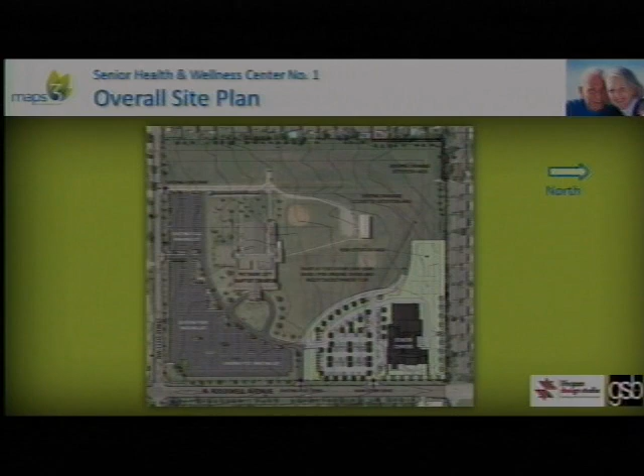As you recall, our site is located on the northeast corner of the present Putnam City Baptist Church site, just north of 112th and Rockwell. Our site will have direct access from Rockwell as well as connectivity to the church property, and will abut the residential district to the north. You can see the building fronts the street and faces south towards the parking lot.

At this point, we've gone from pretty pictures to real technical drawings. This is a site plan, and the important thing to note is the bold line around the perimeter of the project, which is basically the property line that will demarcate the land to be transferred and sold from the church to the city as the site for the project. You can also see on the site there's a detention area, some programmed outdoor space, and the parking serving the facility.

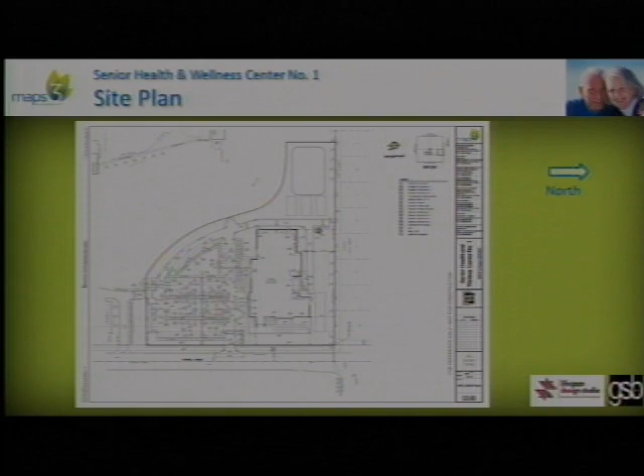There will be people who come to this facility who may never have exercised before, and as they move around the building, they'll see people of their own age and ability level exercising. The hope is we can ease folks into this healthy lifestyle by giving them exposure, and maybe after coming a few times they'll think, I can do that, I'm going to give it a try, and we'll have the resources to assist them. Of course, the fitness pool is a key component to the program.

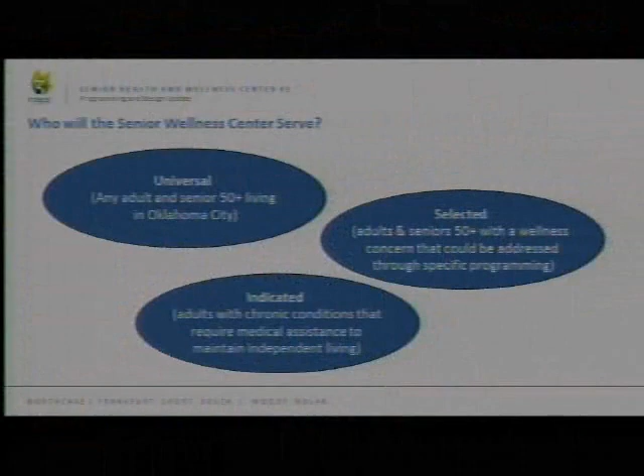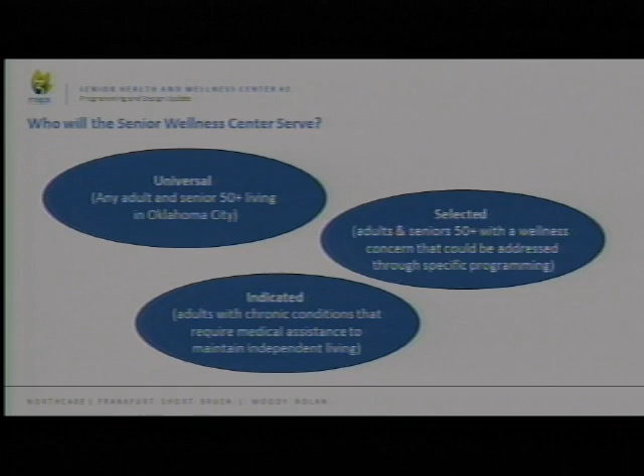Our vision really was to use a concept called the universal matrix of wellness, so that we identified appropriate activities for every level of functioning for seniors. On one paradigm, it has the universal, selected, and indicated kind of things to consider. Universal are for individuals who are generally healthy without major concerns, and you want to keep them healthy and moving forward. Selected may be individuals who have a health issue on the horizon.

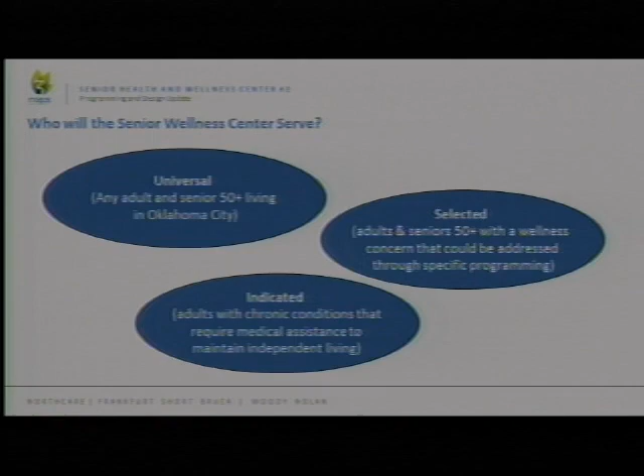We also wanted to have all the kinds of inputs that we needed for communication to make sure we're running this as a world-class senior wellness center. So we have our own board of directors that's serving as a governance for us, but we also plan to put together an advisory board.

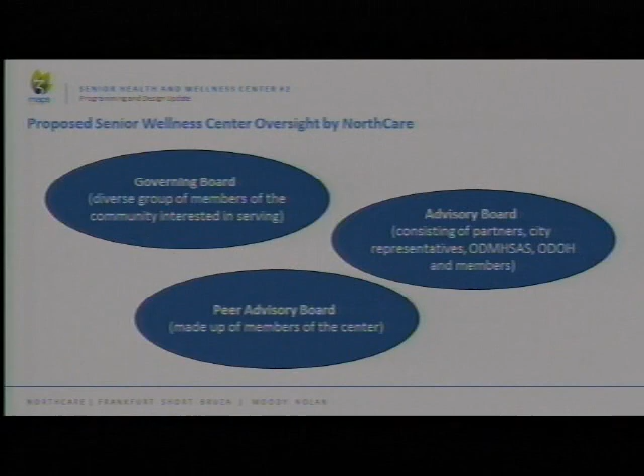The advisory board still could have a lot of changes before this thing is up and running, but we anticipate the organizations that fund the services that are actually part of the operations having input. We anticipate the partners that make up the collaborations that are working within the Senior Wellness Center, and some individuals who are seniors coming to the center being on this board as well. And then, of course, we want a completely consumer senior board that's advising us all the time on how this should be fluid and constantly changing and meeting their needs.

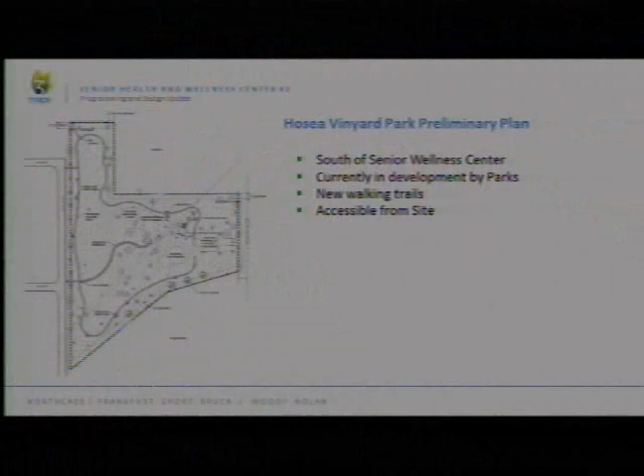What's interesting is that both of those facilities will be able to work with the center. The park to the south is planning a new walking trail that the senior center can actually access and use as well. And to the north is the high school, and they can use some of the facilities - there's a tennis court and parking for their special events.

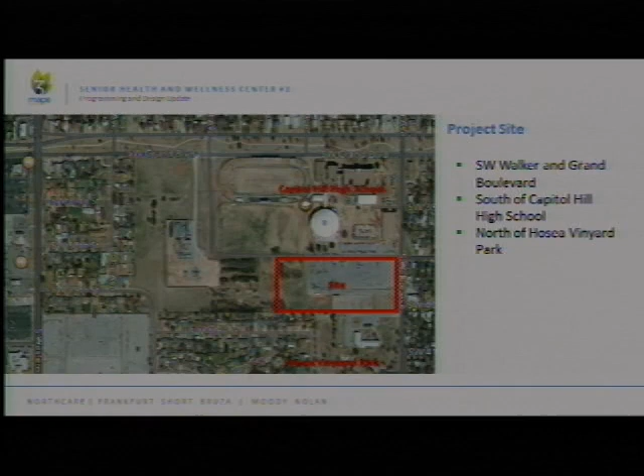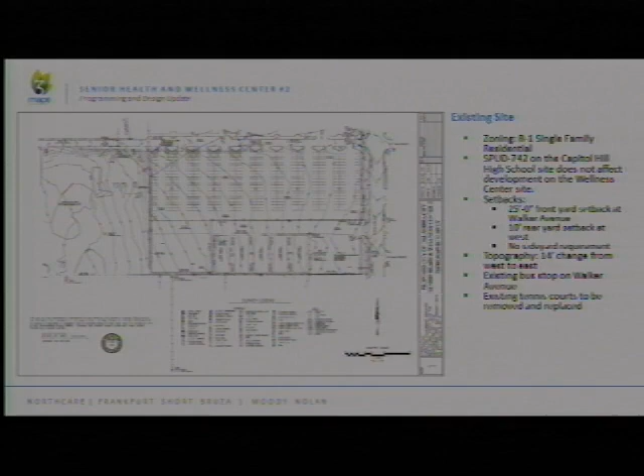This is a survey that shows the existing site. You obviously can't see it on your screens, but the tennis courts were our original site here. This is a parking lot that's existing, and it is currently zoned R1. It's all owned by the school district, and there are some site challenges - there's a 14-foot drop across the site that requires a little extra work on site development, and we have to relocate the tennis courts as part of the arrangement with the school district and build new tennis courts for them.

Area plan. I'm going to turn it back over to Mark. We're getting the design now, and he can go through the concept a little bit.

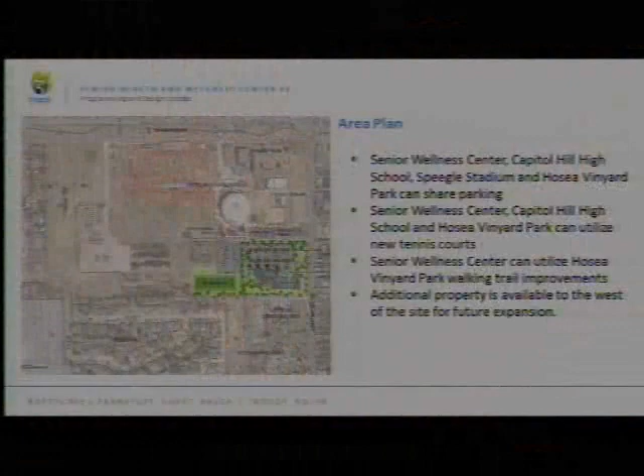When we look at this site, it's a great site with the connection to the park and the high visibility along Walker, and the ability for parking and to share parking with its neighboring facilities. It was really a project that we looked at in terms of how it fit the site - creating a building that had a front door, a front porch, and a backyard and back porch that connected to the park.

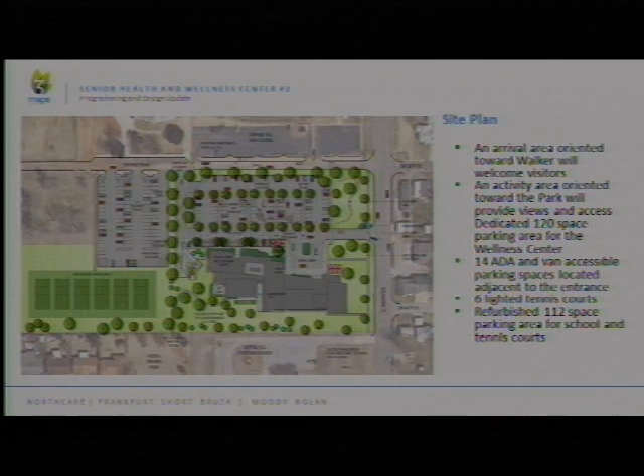The front door has a drop-off loop with covered drop-off for buses and individual cars, a place for people to sit and wait in a front porch setting. It connects very closely to what we call the back porch, which is the covered area on the south side, shaded with both overhangs and trellises that create an outdoor space.

When you look at the building, the idea is that when you came up to it, you always saw activity - you had different choices of things to get involved in. As you came through the center of the building, right at the center of this facility, there's a space accessed by an accessible path from every single parking space in the facility.

You came in, you saw activity, you saw people walking by, jogging by, you saw people in different levels of different types of lounge seating. They might be watching television, they might be playing games, they might be working on equipment. And as you came into that center of the building, you also had access to a cyber cafe and a coffee cafe right there, and a welcome desk from which anybody could look and see all the activities.

We tried to do a building without corridors, a building flooded with natural light, where the circulation was a path of its own, where people would go from different types of salon settings, where people would have different opportunities to interact with each other.

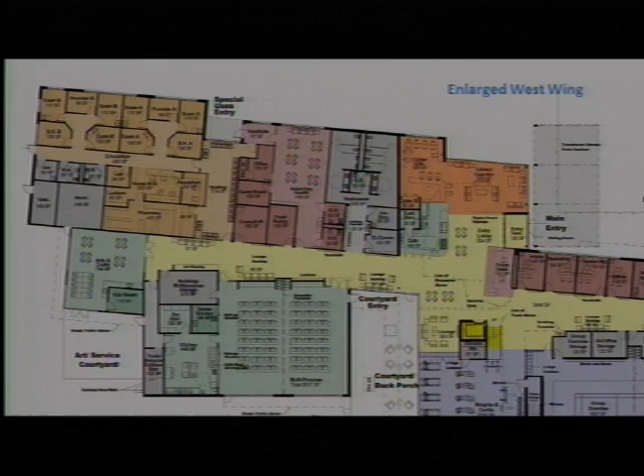On the west wing, we have the more educational and health-related areas, which include a clinic, the adult daycare, a large multi-purpose room with an associated warming kitchen used for catering congregate meals, and a large arts studio with a kiln and an adjacent outdoor arts courtyard.

In the center, right from that center area, there's direct access to the back porch, to shaded outdoor seating. You have views directly into the individual fitness area, which combines cardiovascular and weights training and circuit training - equipment designed for seniors. You also have views into the multi-purpose spaces, sized to be high enough and large enough to serve yoga at certain times, but other times could host senior volleyball, pickleball, or badminton.

And then as you move right along the facility, we have the games and aquatic salon, where there's seating down in an area near the pool, which is out towards Walker. The pool is designed where it has privacy for people getting in the pool, but it's accessible, and people can see the pool is there.

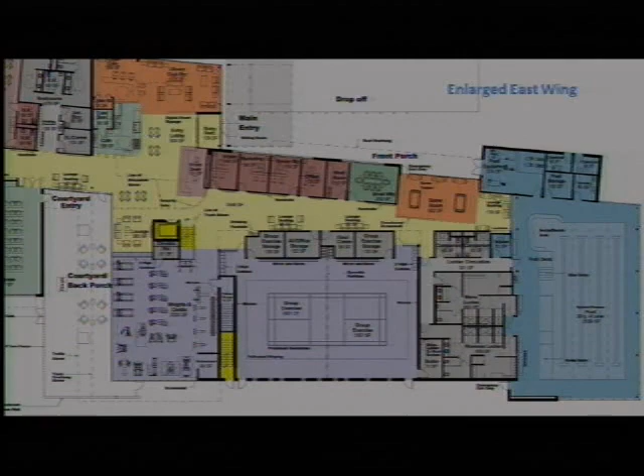One of the real literal interpretations of path was that we've included a mezzanine space in our facility that has a walking jogging path, about a 17th of a mile. That is a course that everyone can participate in, whether they're jogging, walking, shuffling, or rolling. It's a safe place with no traffic or pedestrians crossing it.

It has incredible views out to the park, to the school, to Walker. It has views inside into the fitness rooms, into the multi-purpose rooms, and into the lobby space. So there's always people moving, always that encouragement that anyone can participate in that.

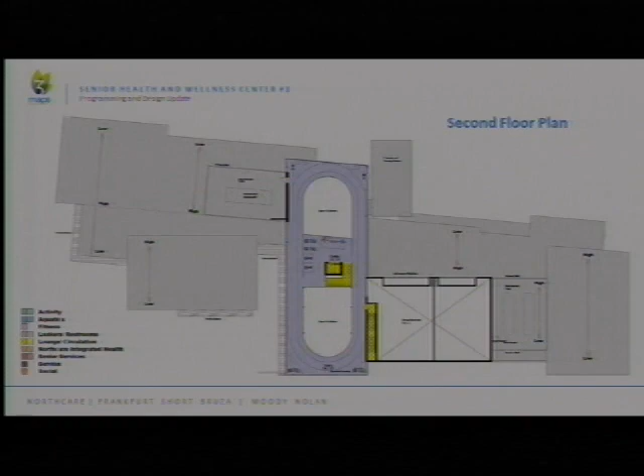So again, we've wrapped this up as a building that tries to be light, always has a sense of activity, and encourages people to get in at age 50, do the more active spaces, then have the services there to support them through the rest of their life and living in a home situation.

Thank you, Mark. Thank you, Mark.

To summarize where we are in the project, we're at task one right now, at schematic design. We've completed that study and are working on the preliminary report, which we will submit in December for approval.

That should probably be in January now instead. So that'll be the next time that we'll be here to see you guys to discuss our preliminary report, which will show a lot more detail and the cost estimates at that point.

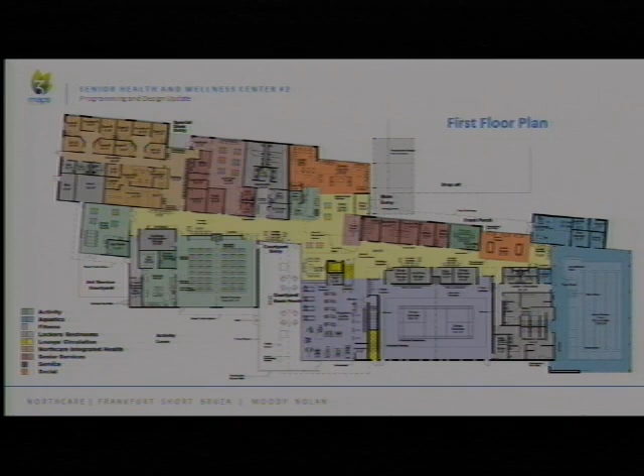On the floor plan, where Gloria mentioned, we have the catering kitchen, the demonstration kitchen, and some storage, and we're talking about maybe reversing this to provide more access from the corridor side. That's one thing we're definitely looking at, along with a number of other suggestions the subcommittee made that we're considering.

Okay. Anyone else? Nathaniel?

I had a question. There's a significant Hispanic population in the local area. Is there any mind toward design or programming that would help capture some of the unique characteristics of the local population, since there's always a unique character to it? Is there any thought to how you get more community buy-in and participation in that design process? Whether through the characteristics of the facility or how programming is done, maybe that's later down the line, but just making sure it's unique to its territory.

Yeah, I think it might be a bit later down the line, but I don't know if Randy has any comments about community involvement in the operations. It's a good point.

This particular area of town is heavily Hispanic. We want to make sure the interior, and as much as possible the design, reflects that. What I've asked them to do is a nod to Spain, bringing in those vibrant colors and those kinds of things.

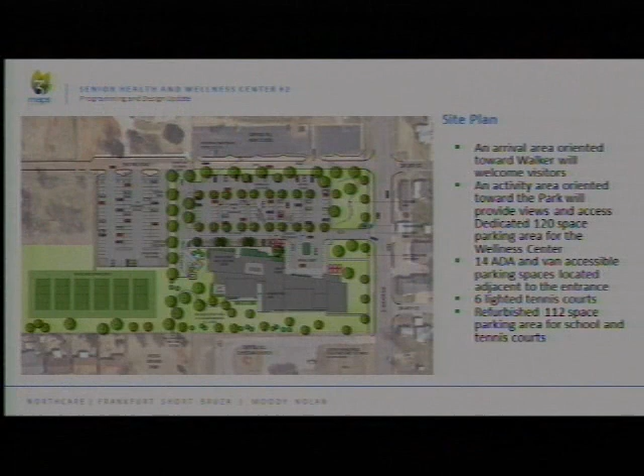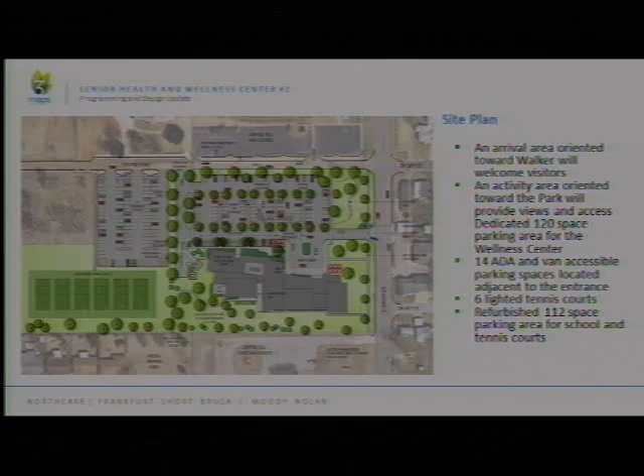This area here down to this point is where the existing parking lot is that the city and school use for overflow primarily. It's not heavily used, but they do use it. So we are using a portion of it for the senior center parking, which is improved and designed for better accessibility.

And the existing parking lot, as Mike mentioned, is kind of past its useful life. So the part that we're not using, we are planning to resurface for use by the school as well, so it'll be in much better shape when the project's finished.

So they're not actually sharing the same parking lot. They have a dedicated parking lot for the senior center. Yes, all this could be shared. Correct, but this is dedicated to the school for their use.

What we learned is that if you've ever driven over there, for the most part during the day there's no one parking there. That parking lot is very huge, and it's really used for football games and special events at the school, but during the day it's just not normally utilized. That's why the school board was so enthusiastic and supportive of allowing us to use part of that parking lot.

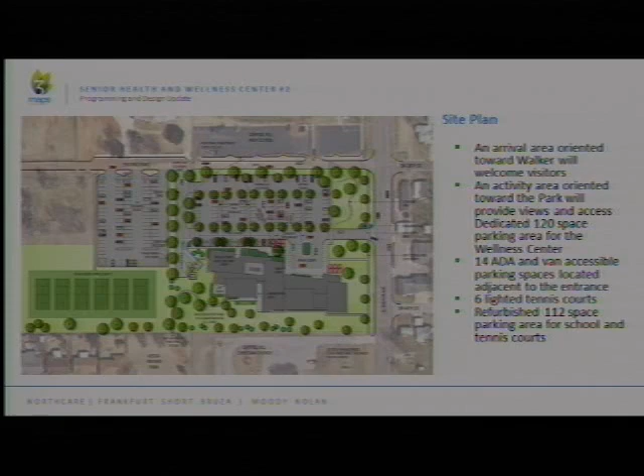This parking can be used to support the new tennis center, which will have lighted competition courts, and it could also be used by the park as well. So all of this area could be...

The parking lot directly north of the center will be dedicated to the users of the senior center, so it won't be students filling it up early in the morning such that there's no parking available. But when the center's not in operation, it could be used for overflow.

It appears from this preliminary presentation that this has been such a great partnership, able to take the concepts that NorthCare brought to the table, which are unique and special to the area, and to begin to see it. Alan, you and I have had this conversation a lot - I'm not very good at spatial relations, but to see it begin to come off the paper and translate into a three-dimensional building is really exciting. Yes, and the next presentation will show a lot of interior views and more three-dimensional information, so that'll be helpful too, to visualize. Congratulations. Thank you.

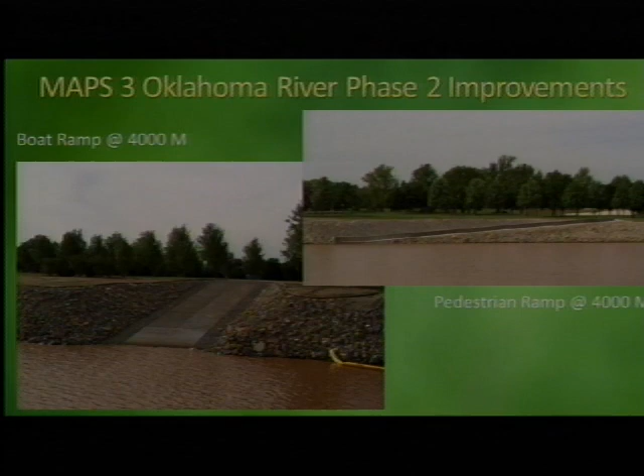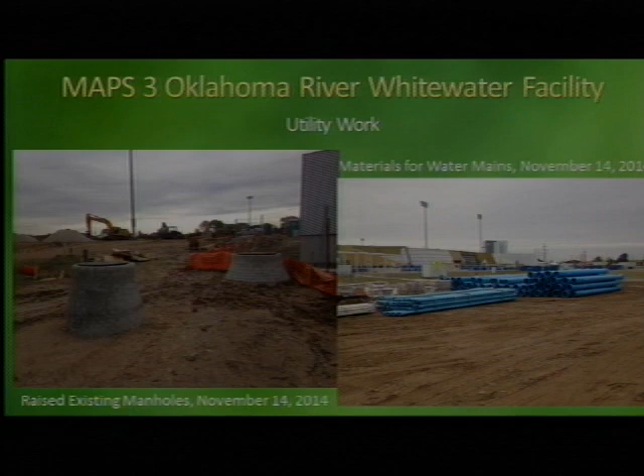One of the things we're concentrating on right now is utility work. On the left, we're raising a lot of existing manholes - we're raising the grade, so obviously we have to raise all the manholes up to meet that grade. On the right, we're getting ready to put in a bunch of new water mains, and that's all the materials there, getting ready to go in the ground.

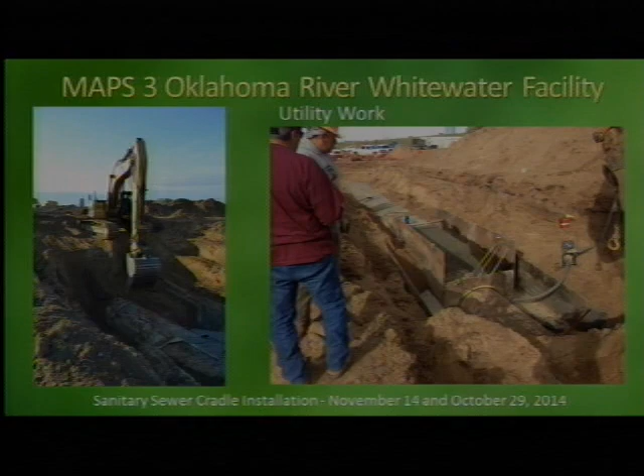Another big part of the utility work is there's a large existing sewer main that runs along the perimeter of our site. Since we're raising grade so much, we're putting a lot of new weight on top of that, so we have to build a concrete cradle on top. We've been doing that, and I believe they're finishing it up today. That took about a month, but they're just finishing now. Then they can backfill, and we can start raising our grade up to build our mountain, basically.

This is a picture I put in here because it's going to be a familiar scene. If you drive by the site regularly, you're probably going to see something like this quite often, because for the next probably 6 months we're going to be trucking in dirt, scraping it, compacting it, testing it, bringing more in, scraping it, compacting it. It's going to be a long process, but it'll look a lot like this for several months. Again, it's all part of building our mountain so we can have a whitewater facility.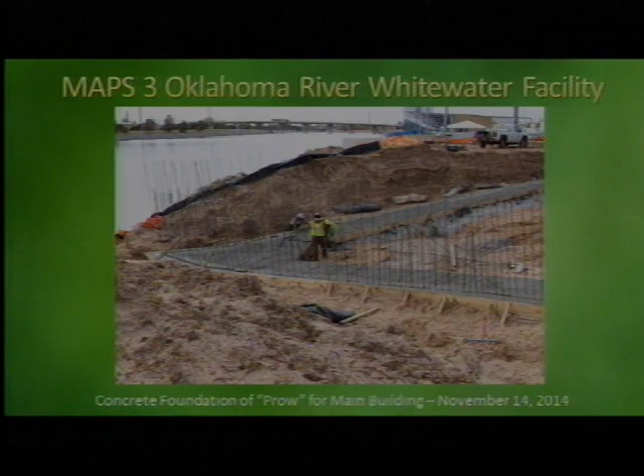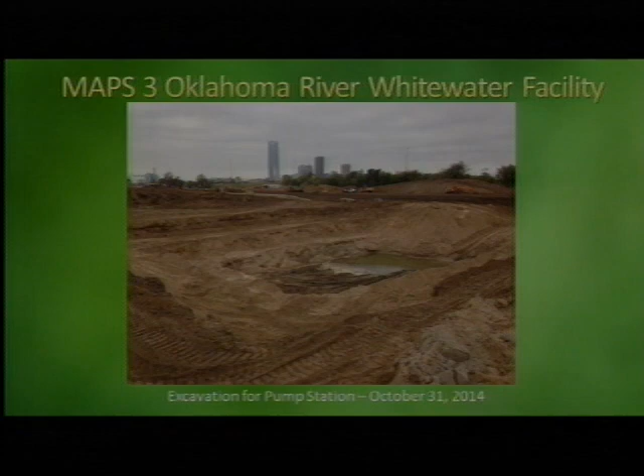This is the start of the excavation for our pump station. This is basically the gist of the project here - this is where we actually take that water and pump it 20-some feet up in the air so it can run downhill by gravity and create our whitewater. This is just the start of the excavation, taken a couple weeks ago, right around Halloween.

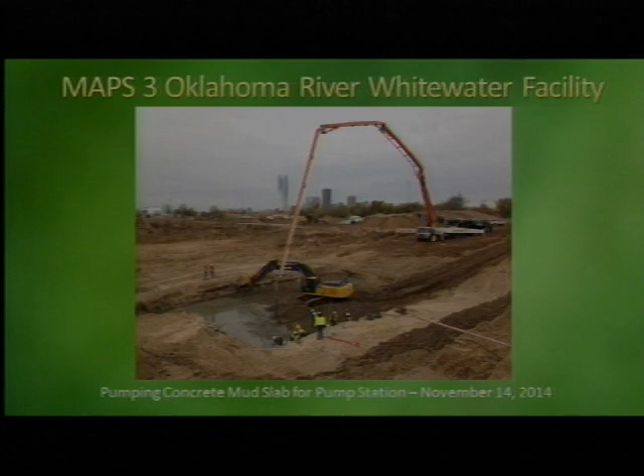This was actually taken last Friday, where we were pouring what we call a mud slab. Rather than the usual method for subgrade, when it's wet, where we'd put in a couple feet of stone and compact it - which is messy and takes a long time - Downey came up, to their credit, and decided to just pour some concrete down there so we've got a firm work surface. We can go to town once that's set up. This is a picture of that happening, and here's a picture just after they finished - again, all last Friday.

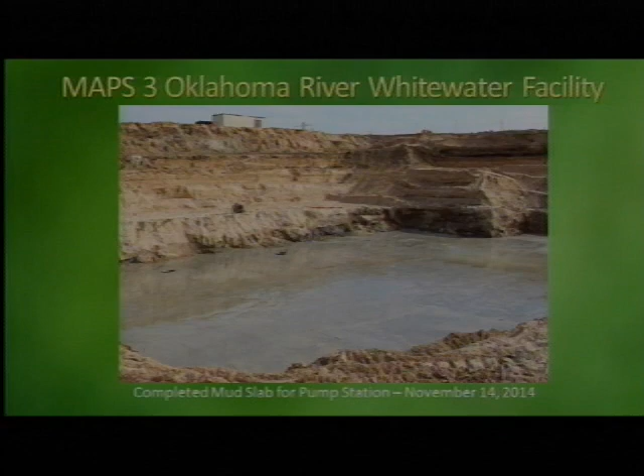As we speak, they're now forming their actual slab. Once that slab is poured, they'll start building the pump station walls, and we'll be going to town. That's the last thing I had, but I'll be glad to take some questions.

Sure. Dee, anything you want to tell us about the subcommittee's thoughts on this?

Yes, we are very excited that we're 96% finished with Phase 2 and looking forward to it. We worry about every penny, every dime, things that are being switched out when we have enough time, but we're very confident in the staff and the people working on the project that they're going to make this come in.

It's going to be a fantastic addition to Oklahoma City. So Mike, do you have anything?

I don't know that I have much to add. We saw the presentation yesterday, and it's very good, and it's good to see all the progress. I think there was some comment made about the pump size. David, did you get a chance to follow up on that? Somebody claimed they thought maybe it was the largest pumps. Or Jeffrey, did we have, probably hadn't had time to follow up on that, as far as the pumps being the largest in the world?

We have not. I know KSB, they do make a larger pump, not for this type of application. They have one that's about twice the size of this. I don't have the specifics on the pump, but they do make one for basically stormwater treatment runoff. In DC, they just recently installed one that pumps out about twice as much volume on the flow, but doesn't have as much head as what we're doing. So for this application, it's the very largest. There's several things with a pump - how high it can raise the water and the volume it can move - and that's what he's talking about.

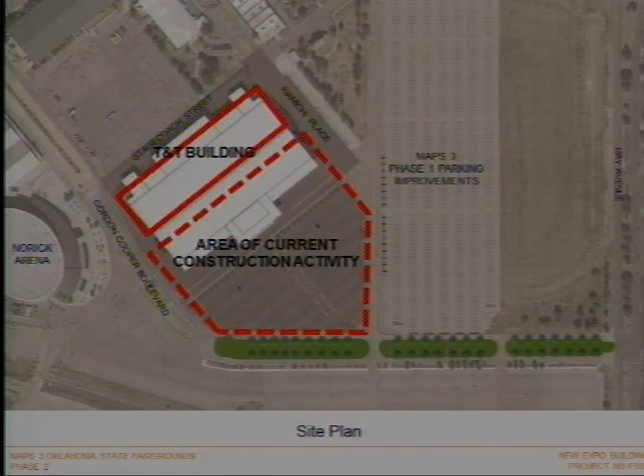The first slide shows the area of activity that the contractor is working in right now - it's a south portion of the site primarily. The T&T building, which was preserved for use for the fair, is going to be turned over next Monday to the contractor for abatement and demolition, and then they can have the entire site. But right now, what I'm going to show you, the photos, is all on the south part of the site.

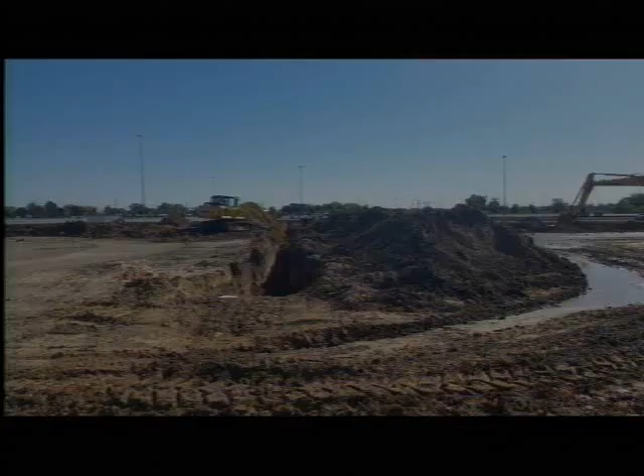These photographs show the site preparation phase, which involves removing or relocating utilities, basically clearing the site for construction. These are trenches showing utilities being removed on the site, then backfill is placed - it's all site preparation work. This was looking east; you can see the T&T building to the left. This is looking directly north across the site - all the paving's been removed and it's being prepared.

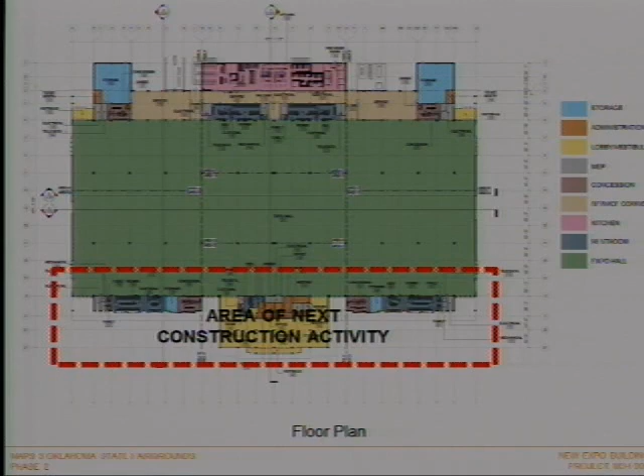So today we're going to go over the proposed change order. I wish it was all a reduction like the last one, but it's a mixture. The first item is concession modification. There are 4 concession areas - we've modified 2 of them, at the request of the State Fair, from a closed sort of counter type concept to more of an open concept where you can walk in, kind of a food court type area. There was actually a net deduct to make those modifications.

The second item was utility modification requested by the utility department - changing the backfill type based on experience at the fairgrounds. We use sand, and they would prefer gravel. They also wanted to revise the water line to provide one single separate water line to the site. We have multiple connections to the main at the fairgrounds, and they preferred one single line connected to theirs.

The third item is asbestos abatement, as I mentioned, for the travel and transportation building - sort of an unforeseen item that was discovered. The city evaluated several ways of doing that, and this is the most cost-effective with the least impact on the schedule. Item 4 is an electrical credit, suggested by the electrical subcontractor, Valsman Switching, which we agreed with and appreciate them bringing to everybody's attention - a net deduct of $33,000.

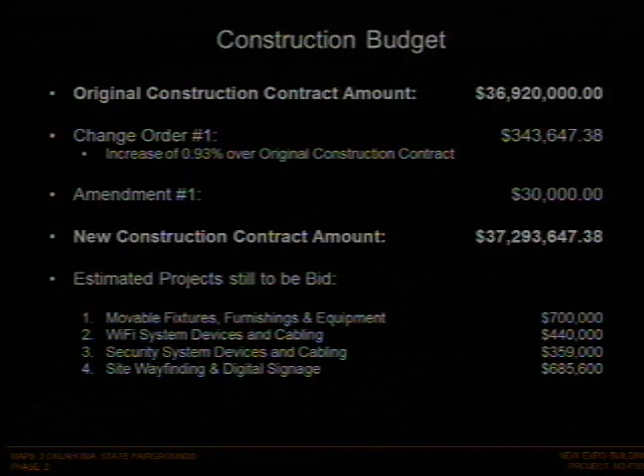The schedule: the notice to proceed was in September. The original substantial completion date was Leap Day in 2016, which would have been interesting, but now, because of the asbestos abatement, it will be March 10th of 2016.

So with that, are there any questions? A procedural question, David — are we including item 10, which I think he has included in his presentation? No, I just let him do the explaining for me. Well, are we considering both item 9 and 10 here? Not yet. No. Oh, all right.

Mr. Chairman, one thing I remind everybody is that it will look this way for a long time, in that there's so many things that are underground — the water, the sewer, the gas, the electric, all those things under that slab. As you drive by, you'll see nothing coming up for a long time, but there's a significant amount of work going on, and then eventually you'll see the vertical elements coming up.